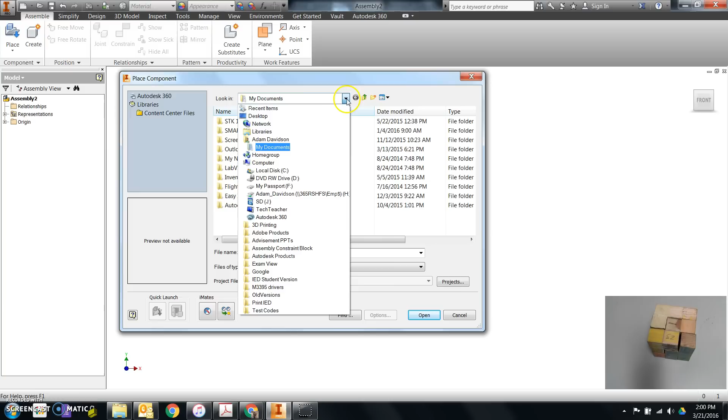First thing I'm going to do is place a component. Now, if your window doesn't pop up like this for you to place a component, it's likely that your drop-down window for place is somewhere on Content Center or Place iLogic component. Just make sure you've selected place or hit P on your keyboard. Once that pops up, navigate to wherever you've saved your files.

For me, I've kept them in the Student Puzzle Cube folder, in which I have my Puzzle Cube grid, and the blue, green, red, white, and yellow parts, all created using that same grid file as I showed before.

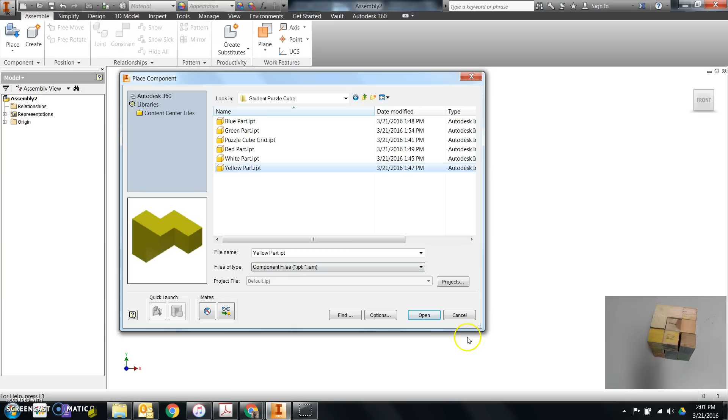I'll start with a file that I want to have dropped in, and it doesn't really matter which one it is at this point. Nowadays with Inventor, you can select multiple parts all at the same time, but just to show you the first time through, I'll pick one of them. So my yellow part, I'll click on it, and then I can click to place it.

It immediately takes me to a top, front, right orientation that is based on how I made that part. Okay, so once it's in, I need its brother parts. I need the other components.

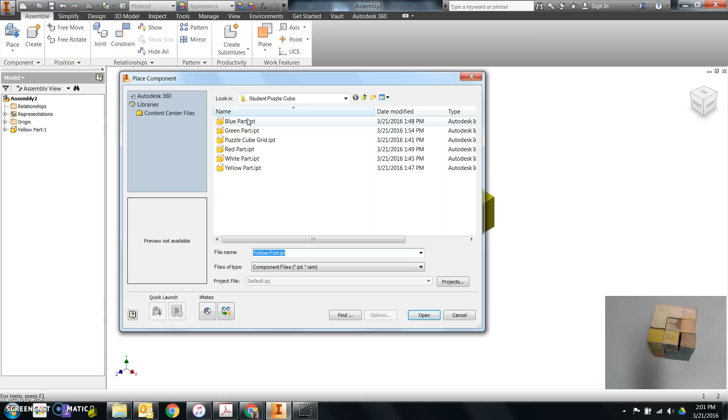So I'll choose place again, and this time I'll hold Control, and I'll select the blue, the green, the red, and the white part, and open them all at the same time. You'll notice that it looks like it's already assembled them together, kind of a hodgepodge of parts put together. I'll right-click and say OK.

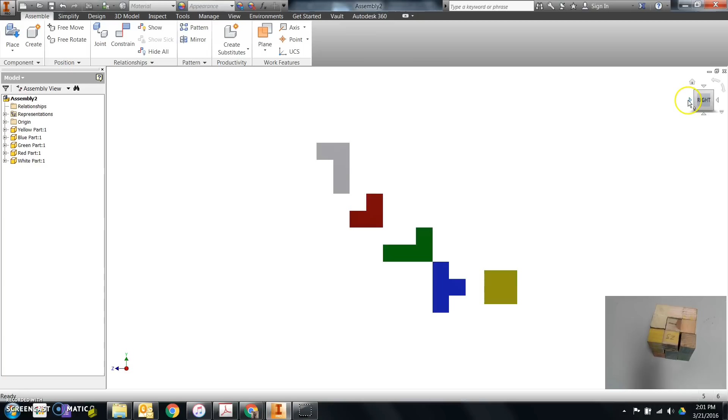But if you look at it from a right side view here with the view cube, you'll see that they're not actually together. You can also see that in the front view. Use the home button to get back to the ISO view, and these I can freely move about. I can also freely move the yellow one.

Now, I want to try and orient these in a way that makes sense, so I'm going to keep my white part here. I'll keep my yellow part off to the side here, the blue one over here, and I'll just move the green one back like that. So, yellow one I'm going to move down here, white one I'll move over to here, green over to here, and blue, yep, you're where I want you, and red, we'll just keep you somewhere in the middle.

Now the red part appears to be the one that is the most interior. This is the piece of the red part that sticks up in the middle of the puzzle cube. The white one stands up like so and attaches itself to the red one, but not in a way that touches any of the faces, only by touching those edges. So that won't really work for what we want.

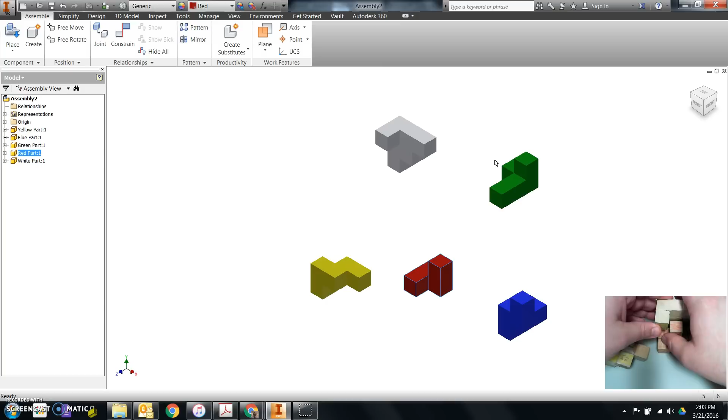But the white one and the green one do touch, and then the red one winds up touching. Oh look, it does touch the white one. It touches it there. Well, that's good. You see, if you don't have the parts with you to be able to make the assemblies, it can be a little more confusing. So it fits together like that.

Now, I could make the white one touch the red. I could make it come in and assemble to the green.

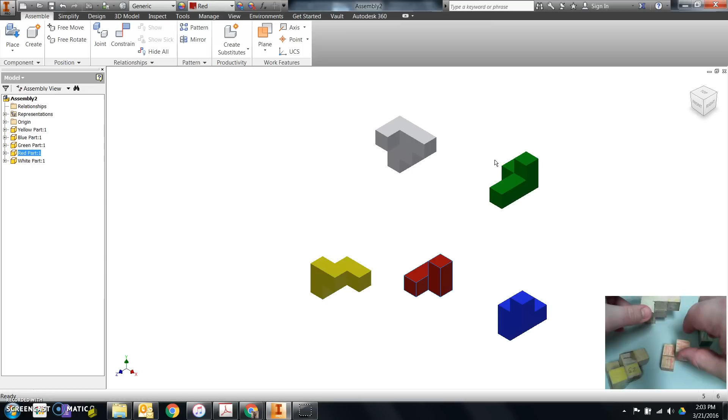I could even take the white one and ignore the red one and make the white and the yellow touch. Any of them that touch, you can work with.

But I like to start with the piece that is most interior, in this case the red part. So I'll choose the red part by right-clicking on it and telling it to be grounded. This removes all of its degrees of freedom. When I hover over it, I get this little push pin.

Completely locks it down, can't move it. The white part, however, I can still move. As soon as I lock it down to the red part, it won't move along with it. It will stay right where I told it to, as long as I've locked it down completely and removed its 6 degrees of freedom.

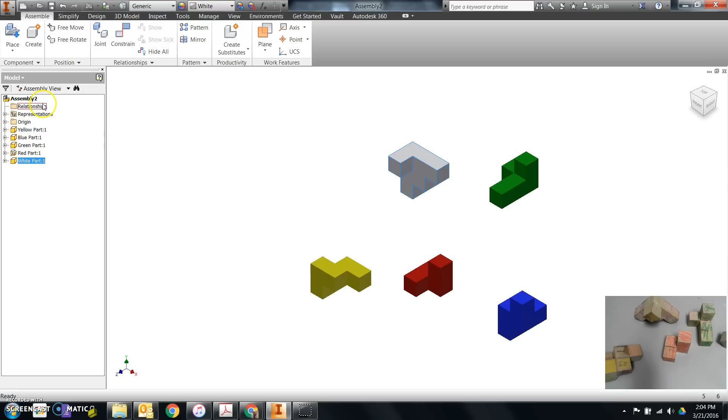So the next thing I want to do is choose Constrain. Now with Constrain, I have mates, which I can do a mate-mate, meaning the two faces are touching each other, like the back of this red one and the front of this white one. They'll touch, okay? Or in this case, this face, which is an L shape, anywhere as long as it's touching that same plane, will be a mate. As long as they're touching in the same plane.

They can move this way, but I can't separate them because they're mated together.

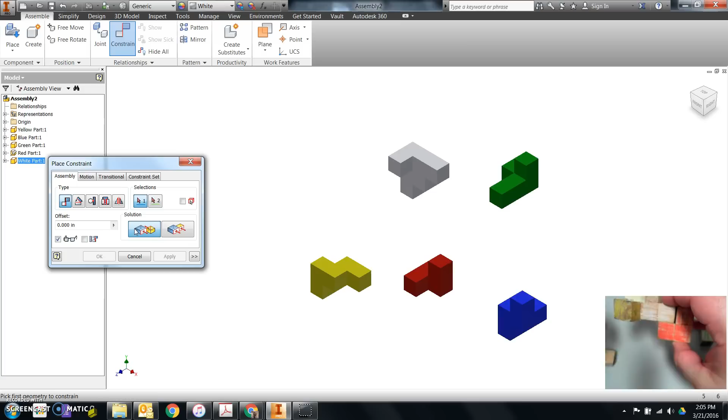Now it's different than a flush. If I were to flush this face and this face, then it would flip one of them around, probably the white one, so that they stayed flush with each other, meaning they exist at the same plane with one another. That's a little hard to understand until you see it happen.

So let me give you a demonstration of this.

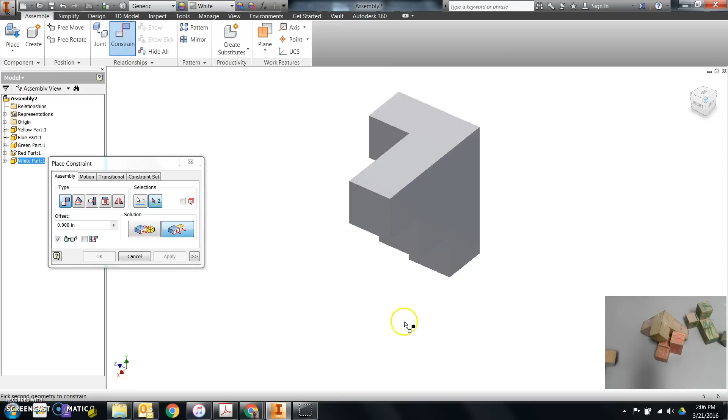Alright, I'm going to mate, but I'm going to mate flush. So a mate flush of this white part right here to the back of the red, and watch, one of them will turn around backwards. And it was the white one that turned around backwards.

Notice how, if I apply this, and then close that window, and I look at it from a right side view, they are now on the same plane with each other. The back face of that red and this face of the white are now on the same plane with one another.

It is recording that, by the way, in my browser where it records my history, and you'll see that that's now a shared flush between the two of them.

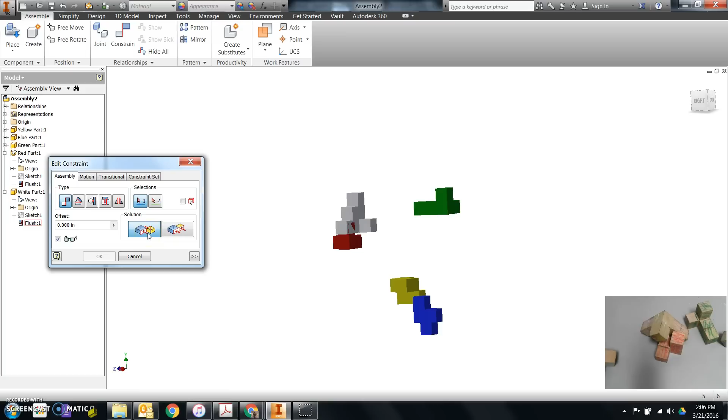I can edit that flush, and I can come back and say, you know what, I want to clear out my selections, so choose for it to be a mate, and apply it between this face and this face, and it'll flip it back around for me.

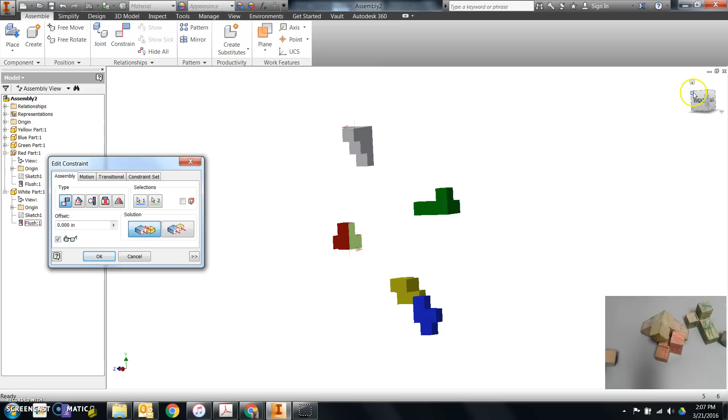I could have also undone, back to the point where I could do it again, or when I edit the flush, could have just chosen for it to be a mate instead of a flush. Once I hit OK, it'll save it.

Now, that constrains it in only one way. I can't pull it away from the object, but I can pull it up and down, and if I go to the front view, I can move it left and right. So with one mate constraint, I've removed the degree of freedom that is a translation in the Z direction in this case.

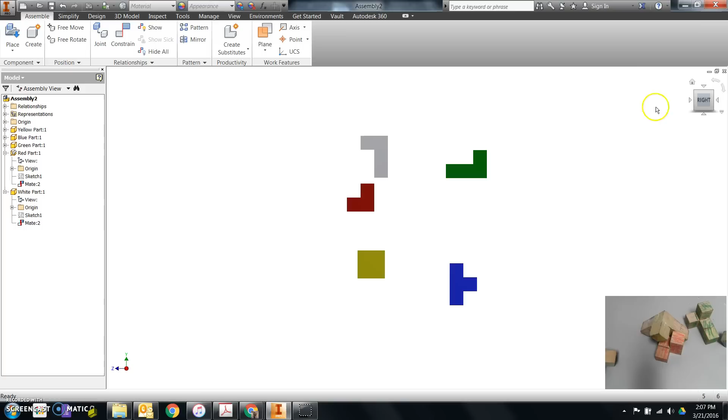So I also want to constrain it so that it doesn't move in the X nor in the Y direction. Now that's a little trickier, but you can do it. See if you can follow along.

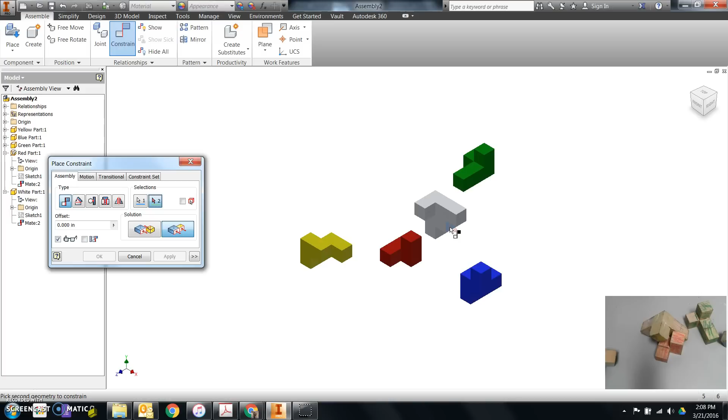Constrain. I like mate flushes most of the time, so let's see what I can do here. I know that the right side face here needs to be attached to this right side face here. And then I will apply that.

And I'll continue along by mating or flushing other faces. Now you'll see I can only move it in this up and down direction. Well, if I go back to this and I look and see that it has to touch it like so.

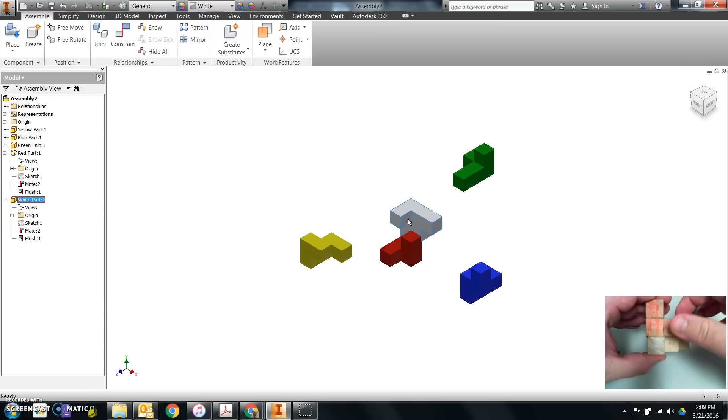To keep it from going up and down, I can take the bottom faces of the red and the white and flush them with one another so that they stay on the same plane, so that they sit like so. And let's see, since I like using flush, let's try that.

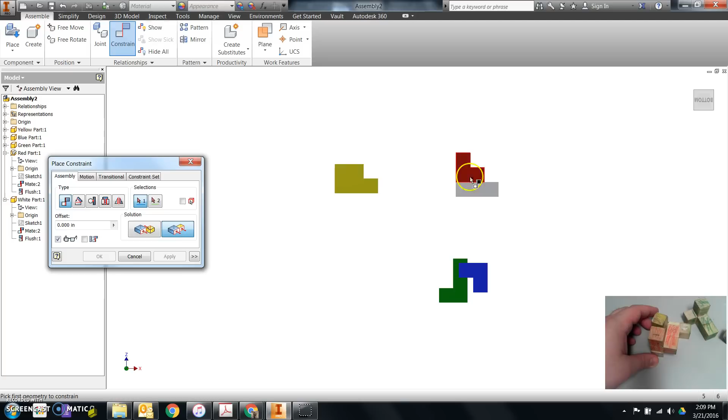I can flush the bottom of the red L shape, anywhere on there, with this bottom square on the right. Notice now how they're flush to each other, just like that. I'll say apply and keep moving along with the rest of my mates or flushes with my constraints.

Let's put the green one in. So it slides in just like this. Now what I'll find is that the bottom of the white and the green are flush. Bottom of the white and the green are flush. Bottom of the green and red are flush. The tops of the red and the green are flush with each other as well.

And this face is mated to this face. Or I could say this face is mated to this face. They're in the same position. I could also say, since I like flush, that this face is flush with this red one. They sit on the same plane with one another. So let's try that. Flush.

Let's see. If I hold F4, I get my free orbit. I can come around to here, click, press F4 again, and I want to say that it's flush with this face. And then I want to apply.

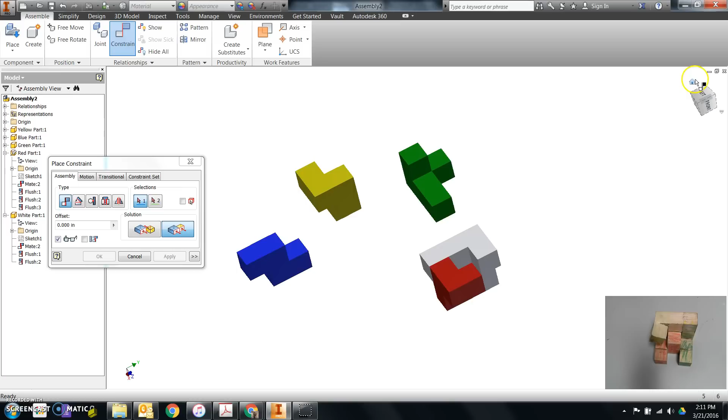Let's see. Yep. Come up from the bottom, flush those. Yep, I like that. And I will flush this face to here.

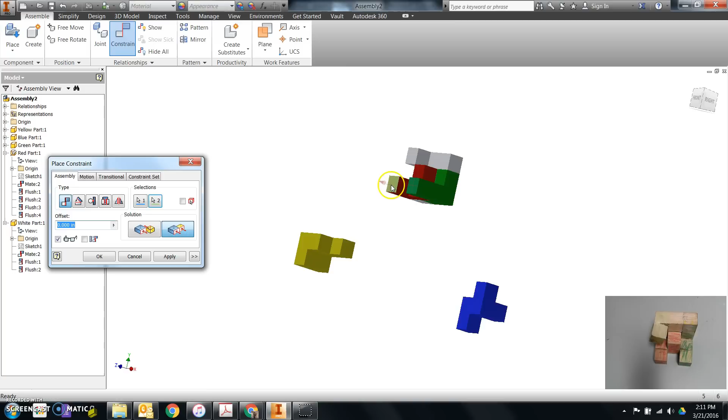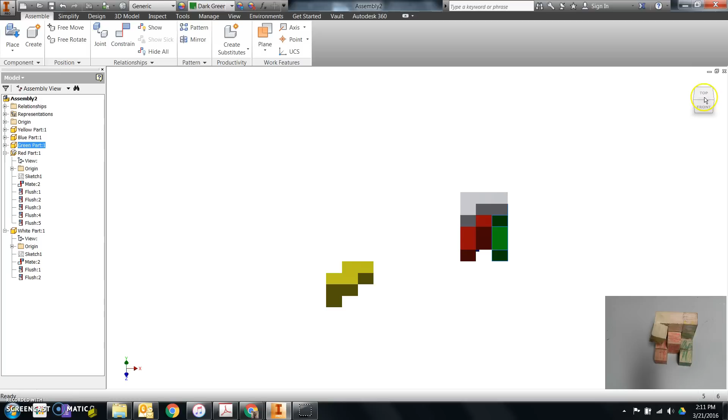And I should find, much like my picture down here in the corner, it looks just like that. And if I say apply or OK and it closes the window, you'll see that I can't move any of those three. I get a push pin for the red one and a no symbol, circle with a line through it, saying nope, you can't move those parts. Alright, so it looks just like this does. Here's my isometric.

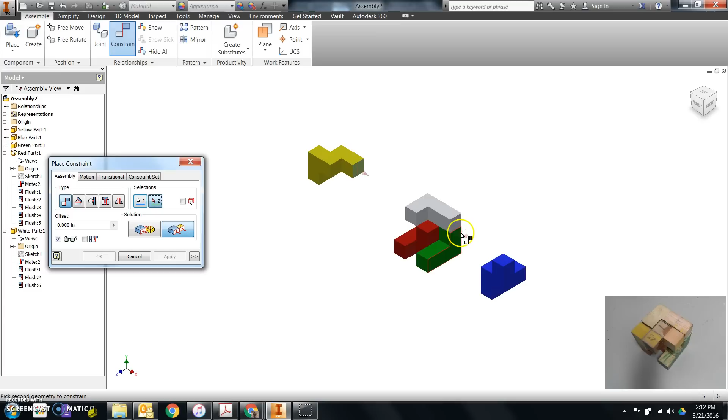Yeah, except for this piece, obviously. Let's put the yellow one in. So the yellow one, top's flush with the white. And I'll apply that. The top is now flush with the white. This guy slides in, so I could say that the right side faces are flush. So let's see. 1, 2, apply.

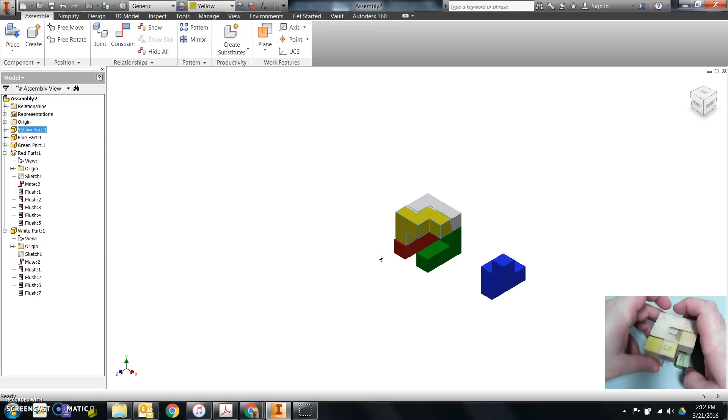But you'll notice that the yellow wants to impede onto the white's area or surface, but that's okay. I can still move them in this direction. And if I notice that the yellow and the red, they are flush with each other as well, down here where my thumb is, if I can get it out of the way for you, these are flush with each other. So I'll flush those. Flush, yellow, red. Say OK. It doesn't move. Good to go.

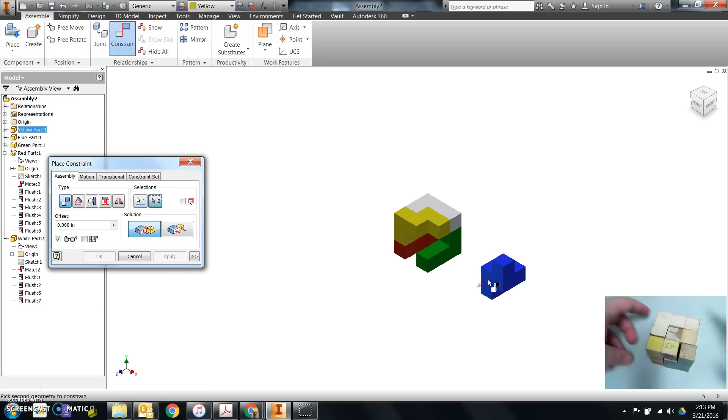Let's put the blue in. I'll flush the blue so that it is sitting in here like this. I'll flush the front face with either the yellow or the red, just like this. So flush blue with either yellow or red.

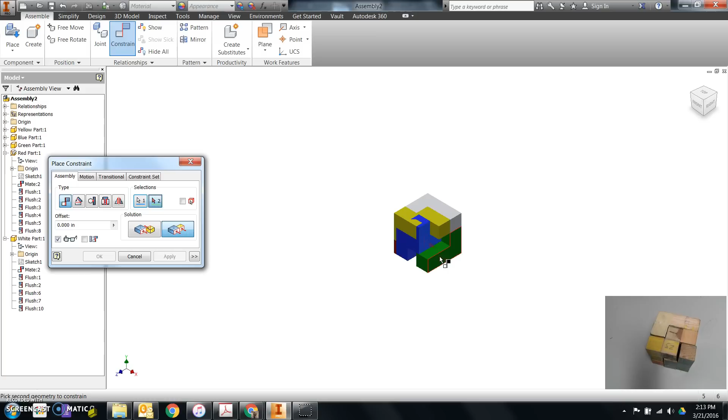I can do the green too. Let's do the green. Alright. I'll apply and I'll flush the top with either the yellow or the white. I'll go with the white. And then I'll apply and I'll flush the right sides together. Not worried about the fact that the blue is intersecting with the yellow or the red, which you can't see on the inside. Once I apply or say OK and it applies and closes the window, check to make sure none of these move, and I'm good to go.

I then would save this file as an assembly. So I would go to save. Since I haven't saved the file yet, still calling it assembly up here, it'll ask me what do you want to save it as, and I'll say that I want to call this, I don't know, Puzzle Cube.

Assembly. And you can give it whatever name you want as long as it's identifiable. You could even just call it Puzzle Cube, and since it's saving it as a .iam, anything else that you call just Puzzle Cube, it'll have a different extension behind it, so we'll be able to identify it. It's up to you as long as it's identifiable by you or your team.